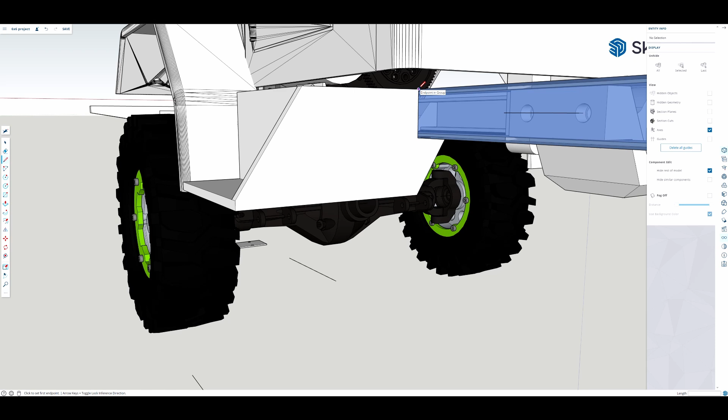In this video, we're going to be designing, printing, and mounting up the fuel tank and the sim battery box. So sit back and enjoy.

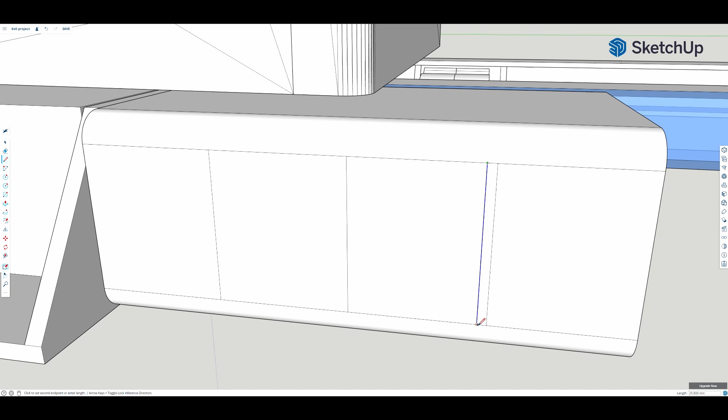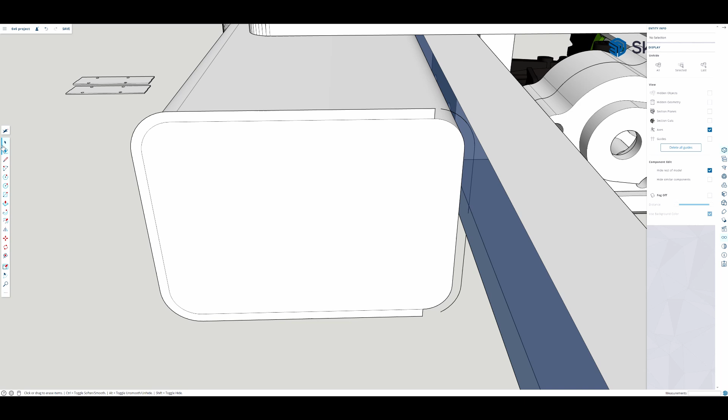So now with the basic shape of the fuel tank done, we can now start getting some more of the details. And one of the big details you always see on a large fuel tank is the straps that hold it down to the frame. So we're just going to figure out where we're wanting them, and with them located, now we can simply add them. The easier way to do this, I thought of when I was doing these: instead of trying to draw out all the shape of this fuel tank, just make a copy of the exterior profile and drag it on over, and each time you want it there, you just add a new layer. I think it's called that with SketchUp.

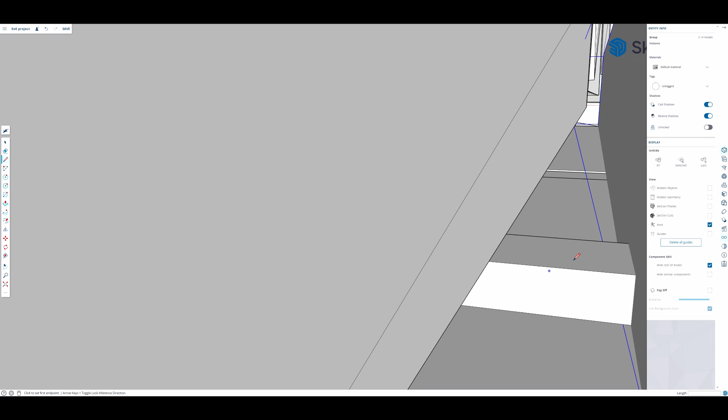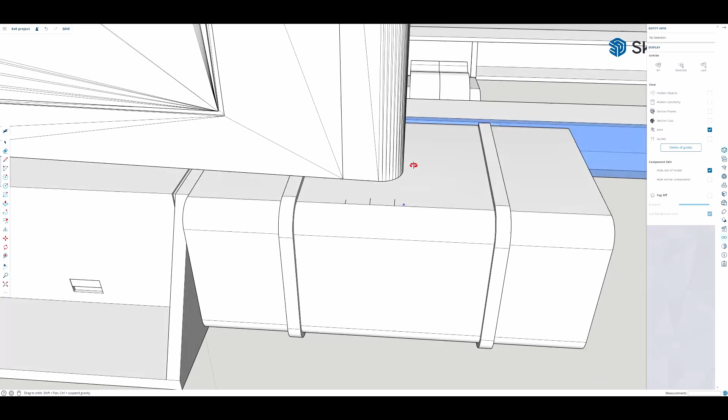And now with the straps in the right location, we can make sure that they're not going to collide with anything. And as you can see, with the electronic tray, we have to trim back the one to make sure that it will not interfere with the electronic tray. And with it being underneath the cab like it is, you will never notice it in photos and stuff. Trying to keep the scale look of this truck as much as possible. Always something that I like to do is as scale as humanly possible with these trucks.

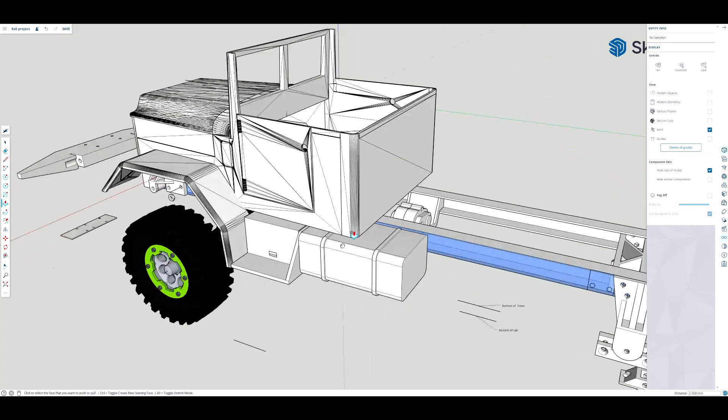So now with the straps done, we can add the fuel fill. And this is one place I kind of messed up. The size that I did, I kind of wish I went a little bit bigger than what I actually did. But it will work. It'll get the idea across.

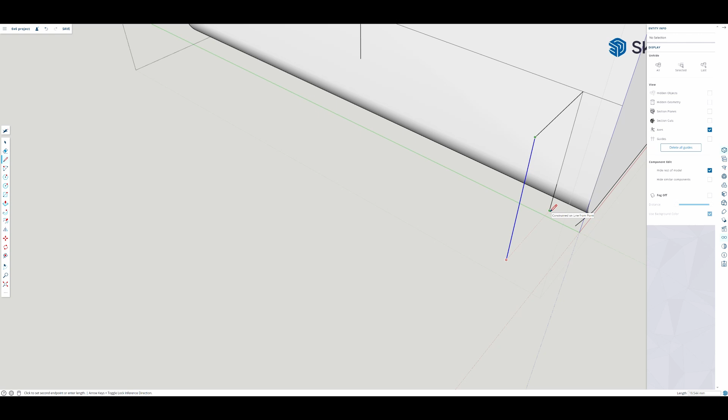Now with all the details done on the tank, we can start getting the mounting solution for the tank done. And since this is a larger part than the sim battery boxes that we did the previous episode for this truck, I'm going to use 2 mounting tabs on the bottom, and then on the side of the tank I'm going to use 3 brass heat inserts.

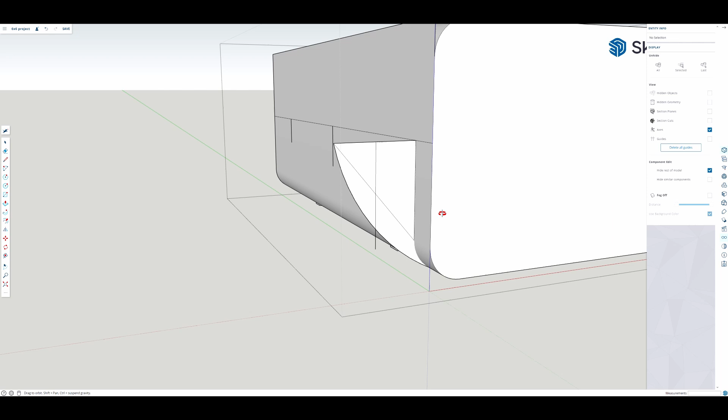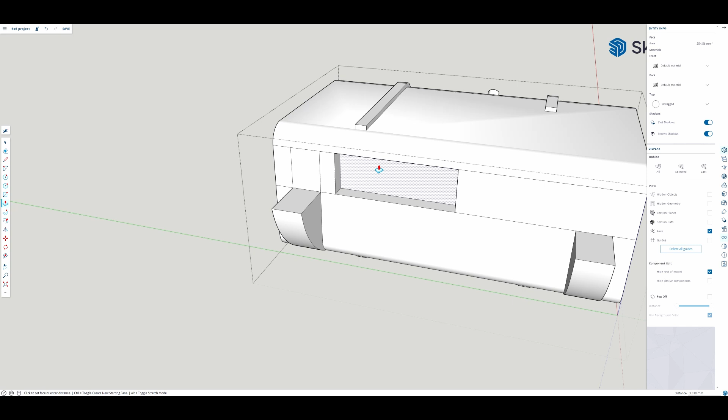And if you're asking yourself why I didn't leave these hollow and put something inside of them, or use them as a container, I should say: the big reason is because since they're hanging below the frame, they're good candidates to get hit by things, and I don't want any electronics getting ripped off the frame. So if it's just a visual piece that gets ripped off, oh well, not so bad, but if it was a visual piece with functional parts inside of it, then that's bad.

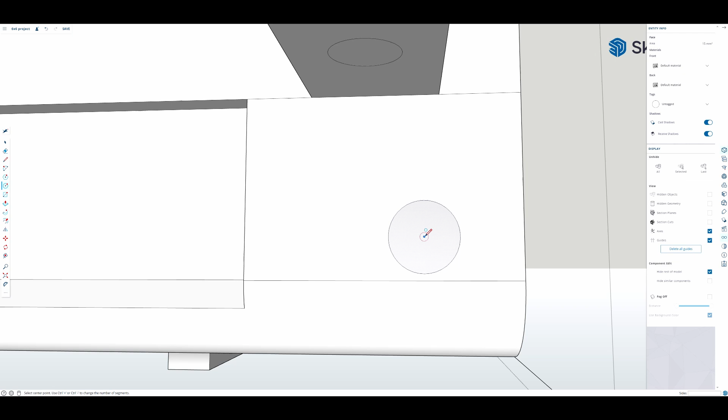And one thing I just did, you saw, was do a recess into the tank. That is for the transfer case screws, because the transfer case bolts to the outside of the frame, and if these are mounted to the frame flush or flat, you'd have contact issues.

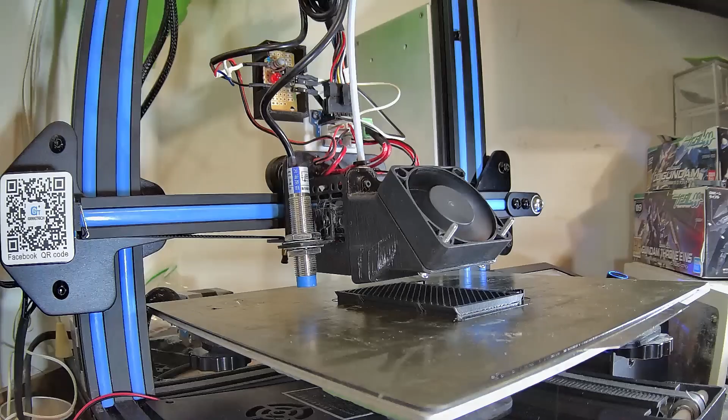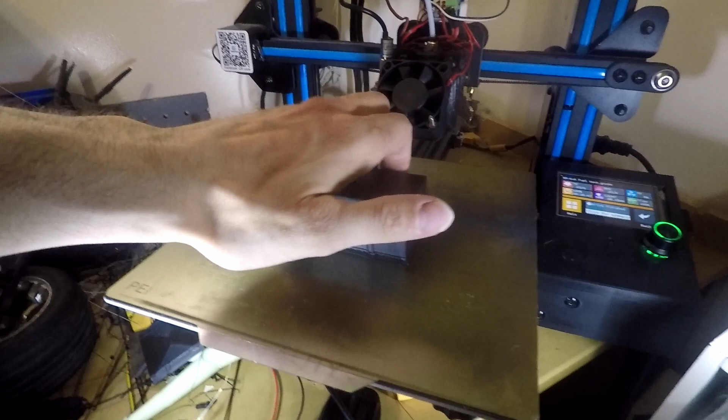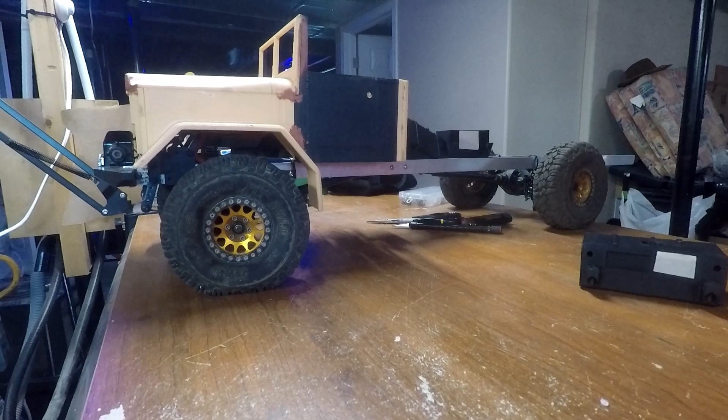So now with the tank fully designed, we can throw it out onto the printer and get a beautiful time lapse. Still having issues with my Mintion Beagle Cam stopping prints, but luckily I was able to get this print without it acting up. I did have a thermistor issue with the printer, which was causing some of the troubles, but still having a small trouble with the Mintion. But as you can see, this print turned out pretty darn good. Nice and clean. Once we get some body filler and paint on it, you'll never see those print lines. Now we can get these bad boys mounted up onto the frame and make this truck a little bit more complete.

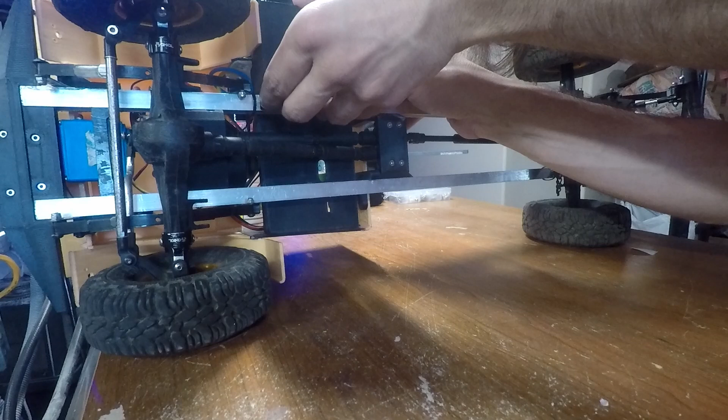And I have no idea what in the world happened here, but you can see that I pushed down on the nose of the cab to make sure it is mounted flat. I used the 2-sided tape that I put on the back of the boxes, so that I can get one of the holes perfectly aligned, so there's no real guessing. And then the jigs that I made up, I didn't show, since you saw me do it once, you don't need to see me do it again. Don't need to bore you with that. So I used the actual part as a locating hole. Once I had the locating hole, I used the jigs. You'll see that here right away.

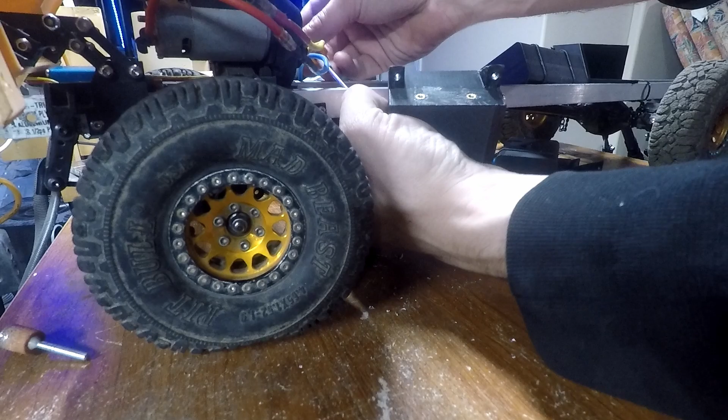And one thing I forgot to do, or didn't dawn on me, I had to remove the electronic tray. No biggie. You can see that I had the one hole pinned in with a screw, got it clamped down, drilled all the holes, and when I went to bolt the SIM battery box on, it was causing absolute collision. It pushed the back of the fender in so much, it was bad. I had to re-drill the holes for the battery boxes, and it left me completely baffled that night, like, what in the world did I do wrong?

But with the holes drilled again, I was able to bolt everything up nice and tight once I had the SIM battery boxes re-drilled. And once everything was mounted up, I stepped back and was very pleased with the way it came out. The appearance of the truck, yeah, it added to that profile. Unfortunately, the night before going out to run the truck, I kind of had a rut, so I had to glue the roof on, as you can see here. But man, with the roof on, the fuel tanks on, and everything, wow, this truck's appearance is mean.